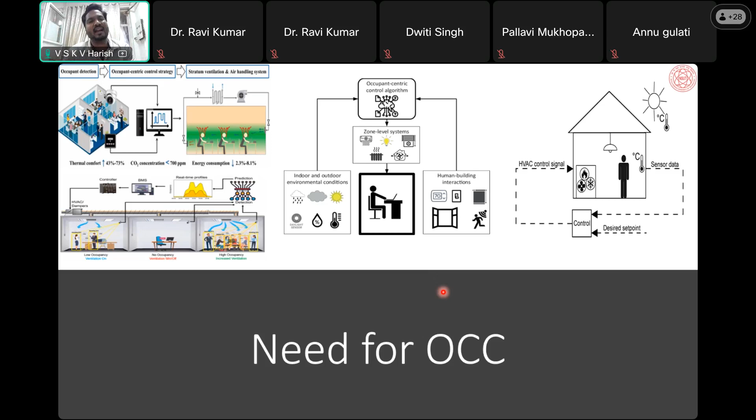Again, I have a sincere request to all the participants and all those who are watching this FDP that all the definitions that I will be giving in this presentation will come from a particular reliable data source, right? So I sincerely request all the researchers, budding researchers or research scholars to kindly go through standardized papers or standardized agencies only, and not only through Google or Wikipedia, right?

So coming back, the International Energy Agency is one such agency which publishes white papers and open access reports. Every year it publishes an energy efficiency report. As per the energy efficiency report, the total energy usage for the building and construction sector is increasing rapidly over time. There are many reasons for it. We understand that there is an increase in population, but at the same time, there is an increase in the standard of living also, right?

And if you come to major cities in India, Kolkata, Delhi, Mumbai, Chennai, Bangalore, you will see that each of these cities has a certain greater part. Delhi, Greater Noida, Noida, Kolkata, Greater Kolkata, Mumbai, Navi Mumbai, right? So these cities are also growing. At the same time, the construction sector is not only increasing surface-wise, but it is also increasing vertically.

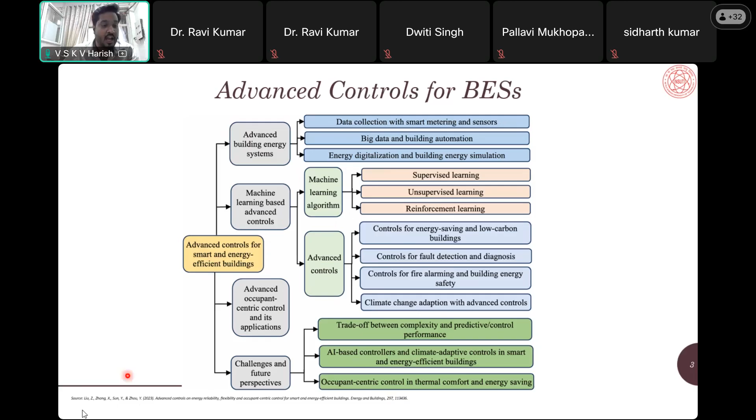For example, if you are working on peer-to-peer power sharing and trading, you are saying that, okay, there are two buildings. One building has a solar PV on the rooftop. The other building, maybe due to weather conditions or not having that much capital investment, does not have a solar PV or has a solar PV of lower installed capacity. Then excess energy can be sold to my peer, to my padosi, to my neighbor, right? Now that excess energy sold to the peer or to the agency can be handled in such a way that it is completely automatic and takes into consideration the occupant's comfort as well. So this becomes a very interesting research study as well.

So advanced building energy control systems can be studied and reviewed in terms of data collection, smart metering, machine learning challenges, and so on. If you look at the relationships and interdependencies between the indoor environmental parameters and their impact on perception and behavior, findings clearly confirm that the occupants' expectations with respect to the environmental conditions do influence the occupants' interactions with the buildings and their energy systems. And such interactions influence the energy performance of the built environment.

So it is not only that, okay, you have installed LED lamps, LED bulbs in your building, मेरी building energy efficient बन गई. ऐसा नहीं. That was a decade-back thing. If you go through the Press Information Bureau, last year the Bureau of Energy Efficiency came up with a gazette notification about the 5-star, 4-star ratings of ACs manufactured before 2024 and after 2024.

So they have given that before 2024 or 2022, this is a 5-star AC. Today, in 2025, you should consider it to be a 4-star AC. That is what I'm saying, because the energy target also becomes obsolete, right?

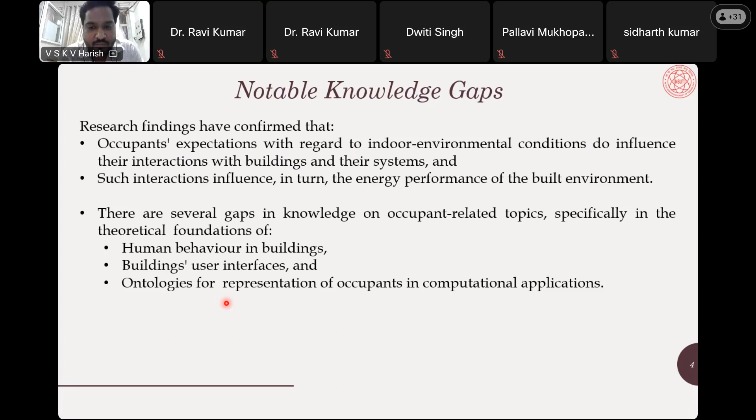So it also became obvious that a truly interdisciplinary or multidisciplinary approach involving representatives of physical sciences, engineering sciences, and human sciences is necessary to cover the complexity of this topic, which is occupant comfort centric control. Not only architecture, planning, mechanical, civil, electrical, electronics, communication, and CSIT people should work together, even the social aspects of it are very much necessary to understand occupant comfort centric control.

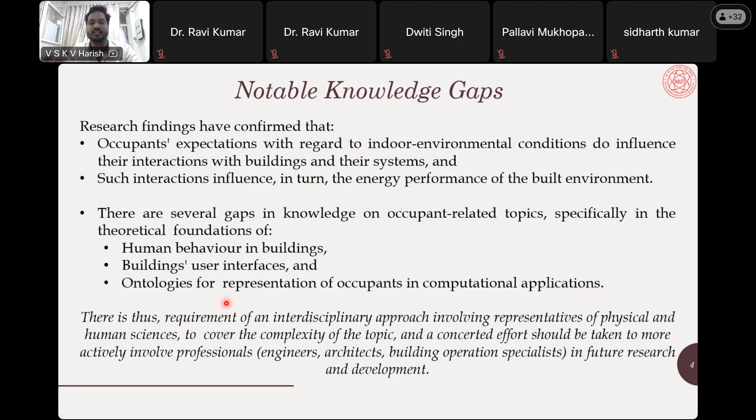I hope I have taken sufficient time for you to understand the relevance of why it is important to know occupant comfort centric control of building energy systems.

If we come to know how do we approach it and why is it necessary, the main question we need to formulate here is: we understood that yes, it is important that we consider occupants' comfort because there cannot be a smart energy efficient control if the occupant is not happy.

If I am sitting inside a building and my light, fan, AC, printer, laptop are automatically running, but I am not happy about it, if I am not happy with the energy systems operating in my cabin on their own, then I will not regard it to be a smart energy control system.

So how can we integrate occupants or humans into the energy control loop for smarter building operation? Or in other words, how can building energy systems balance the occupants' comfort with energy efficiency targets? This is the major question that we will try to address in this course of presentation.

How can we integrate humans into the energy control loop? And how can building energy systems be operated so that they balance occupants' comfort with energy efficiency aspects?

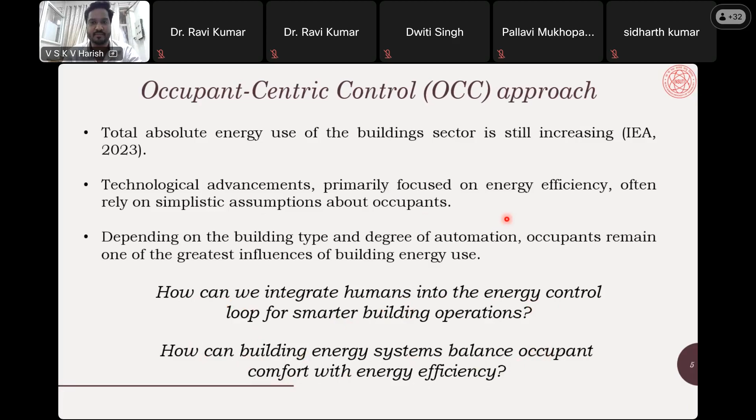Traditionally, occupants have access to an interface, remote control, or thermostat. That is traditional control, using plus and minus, with a device that has certain sensors, through infrared, Bluetooth, Wi-Fi, or whatever mechanism, because we can also use mobile phones to control my TV, my air conditioner, if I install a Blue Star app or an LG app, whatever it is.

That means we can use mobiles, my mobile, to switch on, switch off, and change the temperature of this air conditioner. My mobile is connected to the internet through Wi-Fi.

So I can develop an HTML cloud page and control, regulate, and collect all the data for many years on how I am using the AC on June 9th, 2025, 2026, 2027. How I am regulating it, what is my mood, what is my preference, how I am here. Maybe there is a CCTV camera, so I can get access to the activity through the CCTV camera also.

Just hold this thought, okay? It is very interesting. We can control the mobile, right? And interestingly, my electricity distribution company, which gives me the bill for usage, can also access my mobile.

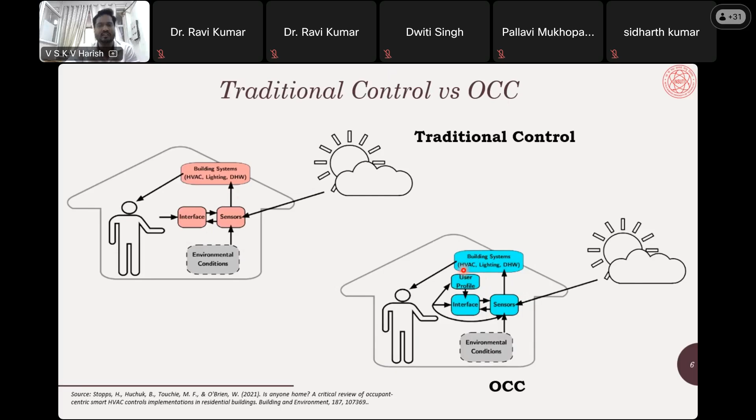That means the OCC systems, the occupant comfort centric control systems, rely heavily on occupants' behavior and their direct interactions with the systems. They develop user or consumer or occupant-definable programs to understand preferences and thereby adjust indoor environmental conditions through set point control of HVAC systems, lighting systems, or DHW systems. So it becomes necessary and interesting to model the occupants and their behavior.

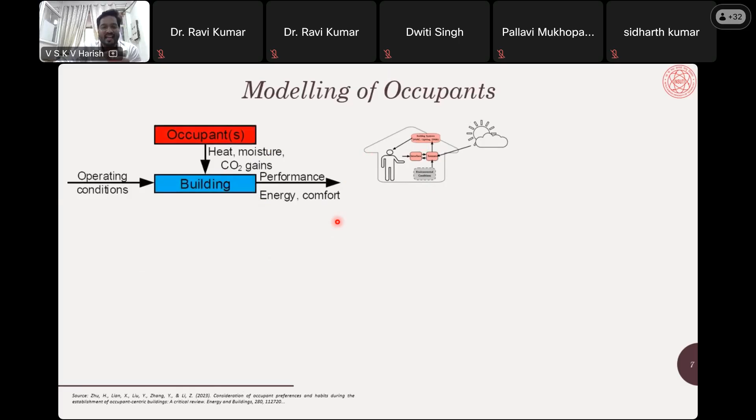International Energy Agency - I request all of you to go through IEA EBC Annex 66. I'll show you, let me share my screen. I think I did not share my screen yet. I'll share my complete screen here. Now, if you go through International Energy Agency's EBC, Energy in Buildings and Communities, Annex 66 - if you go through this, it is open source. Sir, can you see my Chrome? Google Chrome, is my entire screen visible? Anybody from the participants?

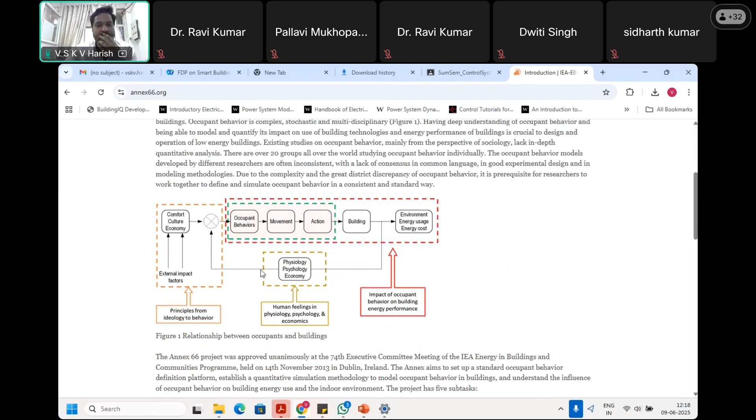It's visible, okay. Now go through this, it is very interesting. If you go through this annex, you can also participate, collaborate, and show your interest, and they work on different research papers. They have different working groups. This annex is completely dedicated to the definition and simulation of occupants' behavior in buildings. You can see what this project is all about, how they are meeting, what will be their next meeting, what is their goal, what are their sub-tasks, how many publications they have published, what is their collaboration, and whom to contact.

Interestingly, you can see that a large amount of research is being developed on the modeling of occupants. So that's what I told you, I will give you the area, the web page, from where you can get the data. I read two papers from this Annex publication, and it was very interesting because they identified through real-time experiments, not theory, that there is a strong influence of occupants on building energy performance. A universal framework will not be possible to develop - this is the first step, second step, third step, fourth step - but they can develop certain guidelines for experimentally studying and modeling the different behavioral patterns and actions of occupants, and how to implement those in building energy simulation platforms. You can use any platform.

You can use Energy Plus, TRNSYS, Design Builder, or you can go through complete modeling or programming in Python, MATLAB, where you are developing the thermal modeling from scratch. And of course, MATLAB has evolved and has certain inbuilt libraries for air conditioner systems and other systems as well.

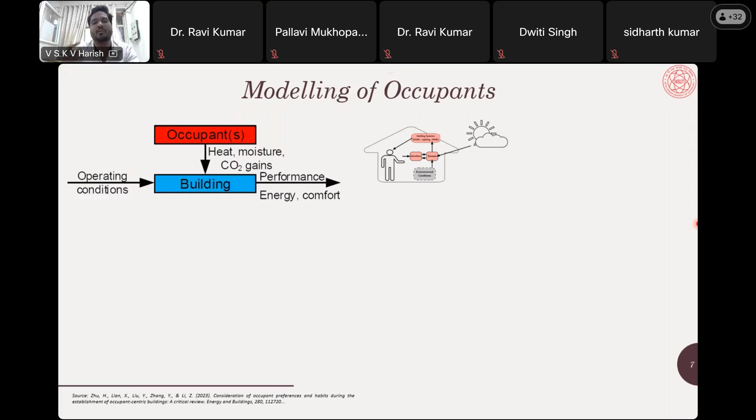So it is not only dependent upon the weather parameters, it will also depend upon the particular occupants and how they are using those building energy systems.

So there will be a paradigm shift for modeling of occupants. Traditionally, you only take, for example, if I am the occupant and I want to set my air conditioner, the only thing I give is plus or minus and give it the temperature reading. And it automatically takes into consideration that for this particular temperature reading of 26 or 25 degrees Celsius, depending upon how I am maintaining the AC, it will provide me the mass flow rate of the refrigerant.

But can it also consider that there is one small device, one small box, which is also controlling the visual comfort, the indoor air quality, maybe the acoustic comfort - that is the indoor environmental quality, IEQ actions - and then taking the particular decisions in terms of control?

At the same time, we are trying to achieve the energy efficient target also. What I really want to put forth here is that working on occupant comfort-centric control does not necessarily mean that we are not working towards energy efficiency or energy conservation. We are working towards energy efficiency and energy conservation without jeopardizing the comfort of the occupants.

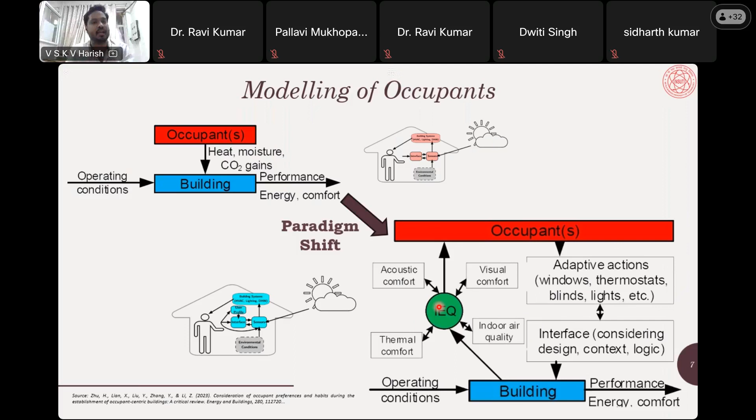That means it is necessary that we ensure occupants' comfort as well as energy savings. So these two things, occupant comfort assurance and energy savings, become the two essential objectives. So it becomes a multi-objective optimization programming problem, and it is interestingly contradictory in nature.

If you increase the occupant's comfort, your savings are less. If you increase energy savings, your comfort is less. So we are trying to work on the trade-off, and there can never be a single solution, because it is again dependent upon the occupant.

For example, you cannot give me a solution to travel from Delhi to Patna. There can never be a single solution. I can travel by train, by flight, take a bus, or use my own vehicle, depending upon my mood, my comfort, my finance, my luxury, and the time I want to take to reach Patna.

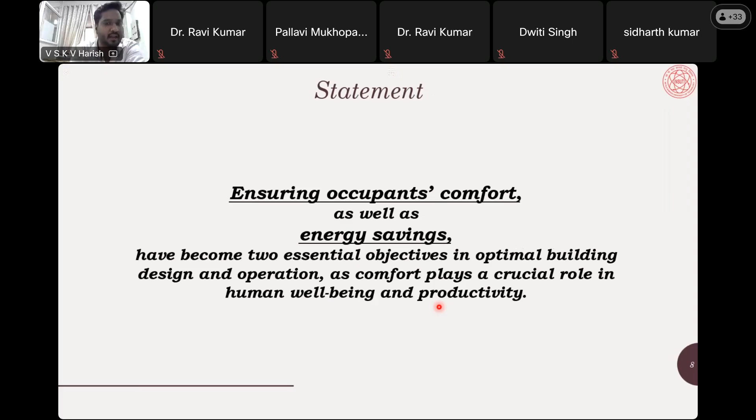So all these parameters will dictate and I will come up with a solution that I should take a flight. Is the flight early morning or afternoon? That depends upon my comfort and my finances. That is me being the consumer or the occupant in this particular aspect.

Now, if we talk about working on occupant comfort-centric control, we have to mathematically model the occupants and do the multi-objective optimization problem. But how do we integrate the comfort levels, especially the thermal comfort level, and develop a multi-domain architecture or multi-domain framework for the built environment where a consumer's perception of control and comfort is mathematically realized?

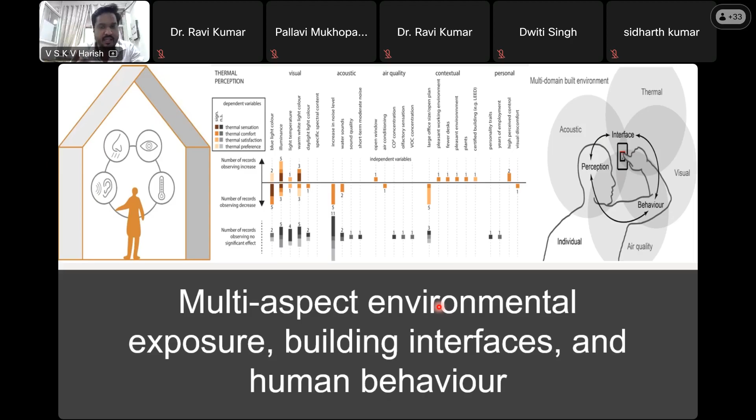So what I'm trying to say is, can a consumer's social behavior, the mood which I told you about, be mathematically quantified? There is certain research being developed and worked upon regarding what can be the primary elements of the multi-domain built environment that is being considered.

Now here we can see that, as I told you, how a particular user behaves at different periods of time - because collection of data is very much important. The data is very much important if you want to understand the behavior of the occupants.

Unfortunately, in India, I think very recently, in the last 10 years or so, we have tried to understand that building is a sector in terms of energy usage. Maybe in 2015-16, NITI Aayog came up with its National Energy Policy report, where I think it was the first time it was quantified. Otherwise, NGOs, think tanks like TERI,

CEEW, they were publishing reports considering that building should be a sector and it is accounting for this much of energy usage in India. And still, it is not very easy to get the data from an energy perspective. But if you go through excellent journals like Energy and Buildings, Building and Environment, IGBC, CIBSE journals, Chartered Institution of Building Services Engineers journals, and ASHRAE journal, a large amount of research papers are being published where they have collected the data and are publishing it for the last 10 years.

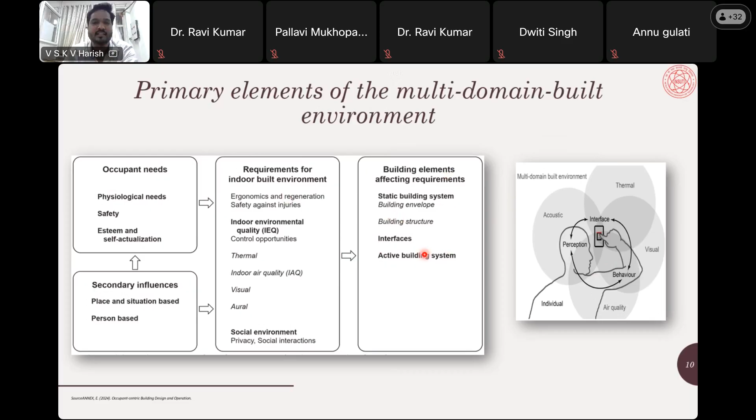And some of the data you will classify as data used for quantification of indoor air quality. Majorly, it is CO2 concentration in parts per million. Indoor air quality has become very important after the COVID scenario as well, because now standards are being developed where it's not only about how humid or how cool you are keeping the environment, but also, depending upon the occupancy, how much fresh air is coming in and how much stale air is going out through the exhaust. So the mass flow rate, that is the air changes per hour, ACH, is also becoming very important. Based on this, you can take building design decisions, interfaces, active building energy systems, which can majorly be worked upon in the building operation aspect as well.

How do you collect the data? One research paper that I came across was using solar PV systems, building integrated photovoltaic systems, and they integrated it with the Internet of Things, that is IoT.

Internet of Things, IoT, where there were a large number of solar PV systems which were integrated through inverters, and there was a weather forecasting system. So what they did is they were doing two things. Either you do the demand forecasting system where you get all the data and you know that this particular occupant or the occupancy family is using the demand like this, and this becomes a demand pattern. And through weather forecasting, you estimate that in the coming years, this will be your solar PV output.

So you do the weather forecasting or the input forecasting or the resource forecasting, and I will also do the demand forecasting. So you multiplex all this and keep the data storage, and that particular data can be analyzed, pruned, and used for machine learning based algorithm, and it is being saved in the cloud. So when it is saved in the cloud, every particular user will be given a username and password, for safety reasons, so that that particular data cannot be shared or used in the neighborhood facility or in the same building, but at the different floors of the buildings.

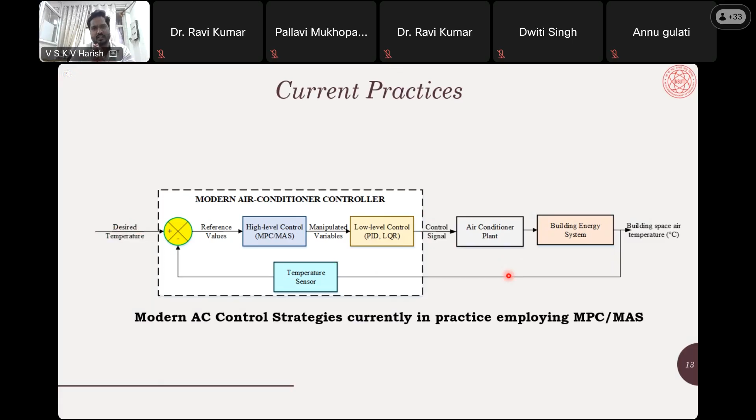Okay. Now, so these are the current practices which we are having. So why I have shown you this is because you can develop a MATLAB based model, EnergyPlus or DesignBuilder based model, and do all the energy calculations, loading calculations, and also energy usage and cost saving calculations, considering these aspects. Majorly, we can use transfer function modeling if we are working towards the control aspect.

Here in our department, in my room, what we are doing is we are developing a hardware in loop test bed of occupant comfort centric control, where we are considering this as the modern air conditioner control. Again, this is not a traditional control. So my benchmark is not traditional control. My benchmark in itself is a smart control, which is coming towards the market in the coming years, or costly, but today it is coming into the market.

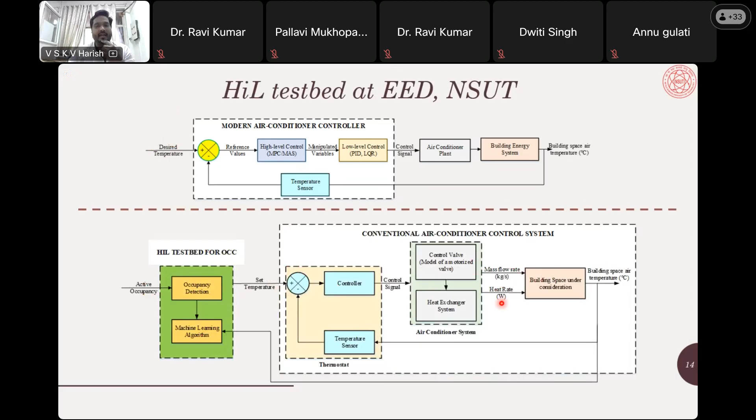And we are developing an occupancy detection. That is, I told you that we will consider the occupant's behavior, and that particular occupant behavior will be regulating this desired temperature. And that's what I have done here. Right? So it is regulating the mass flow rate and also the heat rate at which the building space will be considered. So this will be the space that we are working on.

These are the sensors that I will put. This is my cubicle. These are the sensors which I will put. I am already using this 5-star inverter based air conditioning system. And we will develop a machine learning based algorithm which will learn and observe from the data which is coming from this same ambient condition. This will be my condition from which it will come and save the data.

And we will develop. So there is Energy Plus simulation of the building energy systems, and the data will be collected there because Energy Plus gives very minute data and is very easy and open source. It's an open source software. Weather data of Delhi is available.

So all the occupants' comfort evaluation, all of this calculation will be done from the occupant behavior, and occupant behavior is being considered. There is a small, what do you call it, Google form that is being developed. And every day my researchers come and they ask me to fill that Google form. And that Google form takes into consideration hourly or minutely. And if there is some missed data where I have not filled the Google form, the same couple of slides before I showed you how you fill that particular data is taken into consideration.

So building energy, so this is a co-simulation which is going on. So building energy simulation is happening at Energy Plus, giving the data to MATLAB. The control strategies, the transfer function block diagram, will be developed in MATLAB. So we are working on the robust control where we are using Kharitonov theorem to understand the stability of Routh array and Routh Hurwitz, and the zeros are there in the right hand side, but bringing the poles on the left hand side and achieving the desired control action. And then we give the particular decision making to the lighting systems.

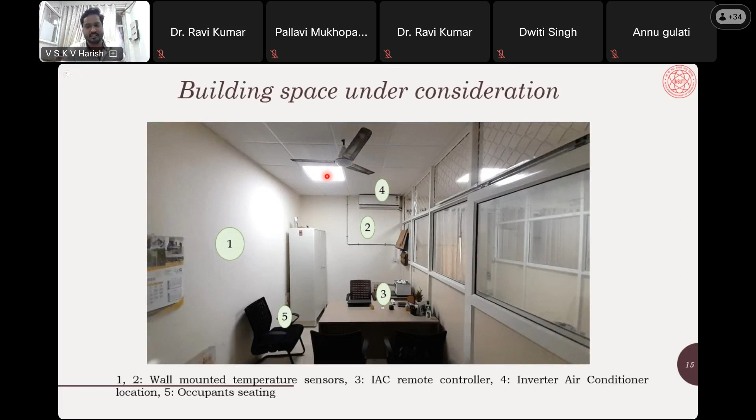Here, the lighting, unfortunately, we are writing a project where this is on and off. I cannot change the illumination level, but I want to change the illumination level. So there is 0 off, dim, slightly dim, average, then bright, very bright. So these are the 6 positions of visual sensation scale, not the thermal sensation scale, but visual sensation scale that we want to work on. Then this particular control strategy will become a little different and a little interesting.

So these are the parameters which we have considered for our building energy system model, because I told you that we will be developing the transfer function based model. For those who are not from EC and electrical background, transfer function is nothing but, since school we know that if you give time data, time will be in the x-axis and in the y-axis there will be a function. So f of t will be in the y, and it can be a quadratic or whatever curve. If I remove the time and do not do the time domain analysis, but the Laplace domain or a frequency domain analysis,

the x-axis will be something different and the y-axis will be something different. So I will not be getting a complete curve, but I will be getting certain points. Using those points, which can be poles and zeros, I can understand the behavior of the system. Whenever I change the location of those poles and zeros, I can change the behavior of the system according to my desire. So this becomes easier as compared to the time domain analysis, where I have to change each and every point of the curve, right? So that is Laplace domain, or the transfer function approach, loosely.

So here there are certain parameters that I have taken as controllable or uncontrollable. Uncontrollable means my control algorithm cannot change the behavioral pattern of that particular parameter. Okay. Controllable means that my control strategy will change it.

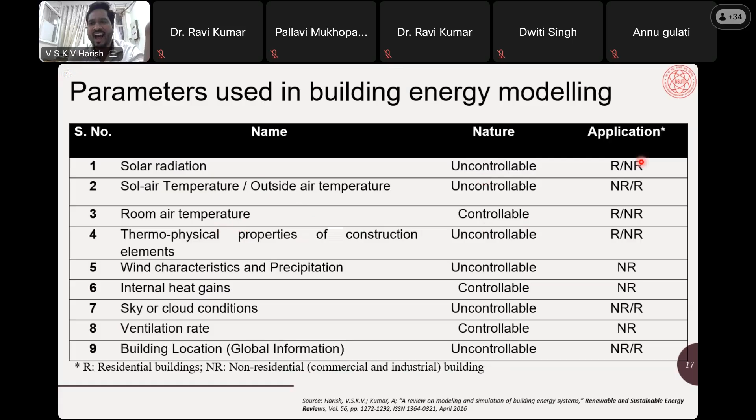RNR stands for residential or non-residential application. So again, we have developed the model using thermal electrical analogy. For validation perspective, I have developed the model in EnergyPlus and MATLAB and then validated it, so whatever control decisions MATLAB takes, they will be valid in nature.

So we have used thermal electrical analogy, which says that as heat flows from a higher temperature region to a low temperature region, electric current flows from a higher voltage point to a lower voltage point. So every thermal model can have an equivalent electrical circuit model where the parameters are dictated by this analogy of physics, where heat flow becomes current and the temperature becomes the voltage. Because the heat is flowing from high temperature to low temperature, the current is flowing from higher potential to lower potential.

So we developed a multi-layer building energy model where every wall is a multi-layered wall. So you have a brick, then you have cement, then you have insulation, then you have certain putty, then you may have a wallpaper. Each and every parameter I have taken from the ASHRAE handbook or the ASHRAE data, and we have used thermal electrical analogy to develop this model.

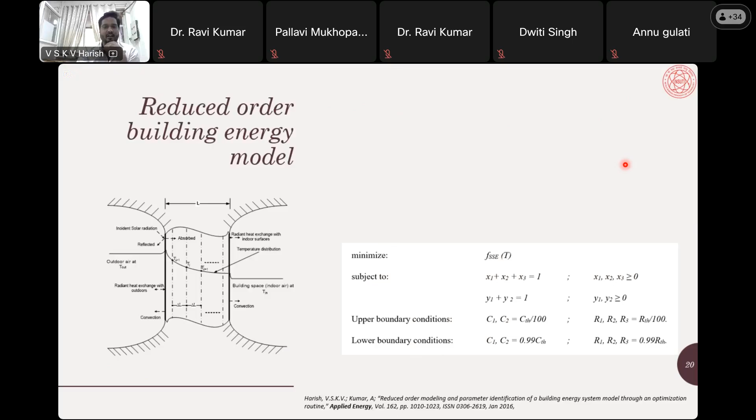I have used an optimization technique. I encourage all of you to go through this paper which we published in Applied Energy, where I have used the parameter estimation technique and also the model order reduction technique, where I have used a nonlinear constrained optimization technique to know what should be the value of R1, R2, R3, or C1, C2.

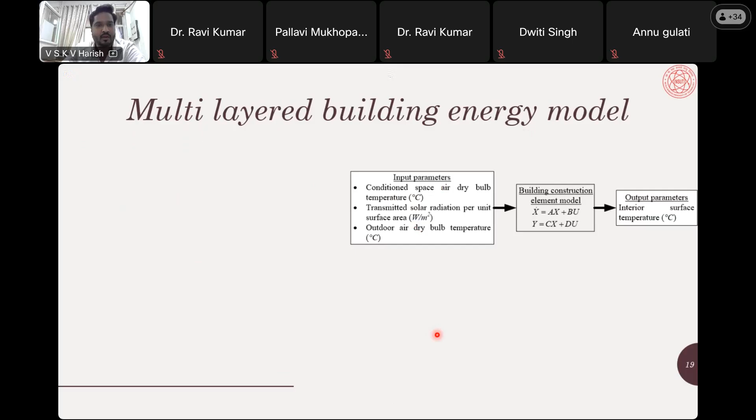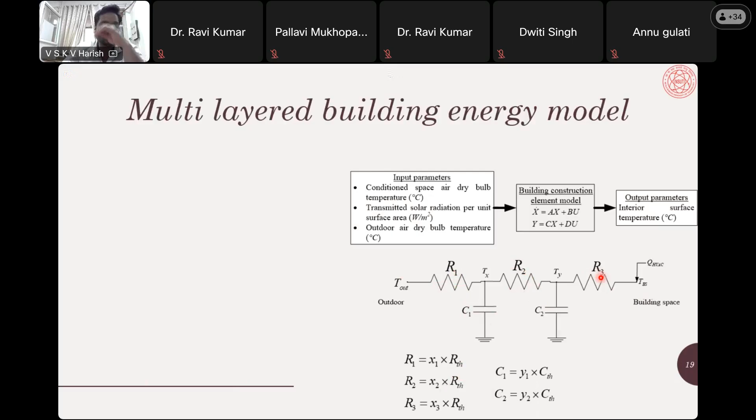Traditionally, I'll tell you what used to happen. Traditionally, you calculate RTH and CTH. This data is given from the manufacturer. So you calculate the total thermal resistance and total thermal capacitance. What studies used to do is, after calculating total thermal resistance, R1, R2, R3 were equally divided, 1/3, 1/3, 1/3 of RTH. For example, if RTH comes to 1000, this becomes 333.33, 333.33, 333.33. In a similar fashion, they equally divided the total thermal capacity. But that is not widely applicable for different types of buildings and different functionality of the buildings. So we developed an optimization technique.

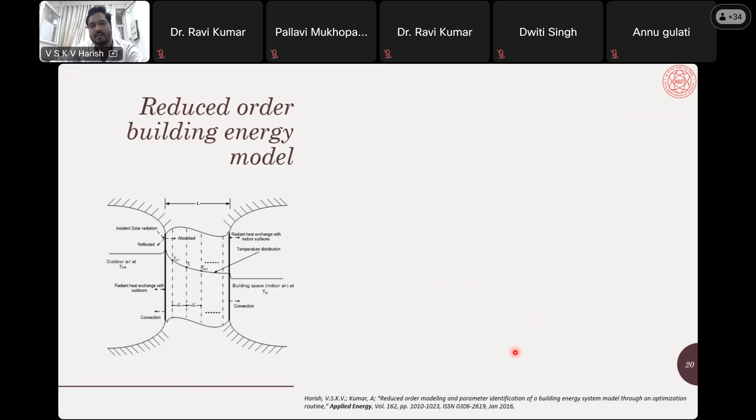We didn't have the funds to do an experimental validation. So what I did was I took the most accurate model for a wall. The most accurate model, of course, is an analytical model, but that does not make any sense. So I considered a numerical solution for that particular model. I used a central difference scheme where there were partial differential equations from Newton's law of cooling. We developed it for a multi-layered wall, and these layers were 100 in number.

And for the same system, I developed a 3 resistance, 2 capacitance network. I gave this particular model an input, and the same input was given here. This is my most accurate benchmark model, and the output from this model is the most accurate in nature, while the output from this other model is erroneous in nature. So I developed a mathematical function to compare these two outputs as sum squared error, SSE. It is an error index. So my optimization became that you have to minimize this error.

How do we minimize this error? Slowly, by changing R1, R2, R3, C1, C2. My algorithm automatically changed R1, R2, R3, C1 and C2 at each iteration so that the output of this model came as close as possible to the output of this one. The values at which these two outputs were very similar in nature are the optimal values of R1, R2, R3, C1, C2. This is for one wall.

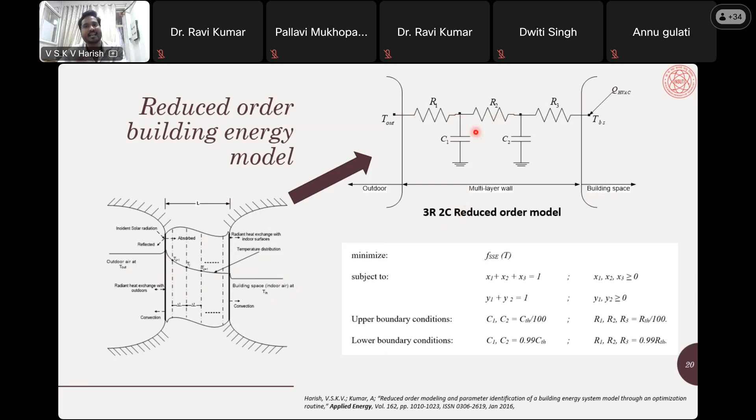I request participants, if you're sitting in your cabin or your room and you look around, you are geometrically sitting inside a cuboid. So you have 4 walls surrounding you, one roof, one floor, and windows. Every wall is a 3 resistance, 2 capacitance network. So if I have 6 such walls, 4 walls, one roof, one floor, I will have 6 such 3 resistance, 2 capacitance networks. And if I have windows, I will have a 2 resistance, 1 capacitance network because of the thermal capacity, since windows are transparent in nature.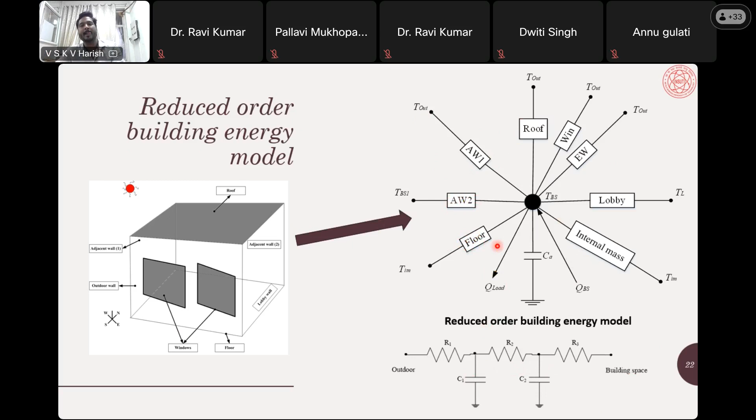So this is a 3 resistance, 2 capacitance network. So this floor block is nothing but this network. AW2, adjacent wall 2, the second adjacent wall, is a 3 resistance, 2 capacitance network, and so on, right? So now I have developed a building energy system model.

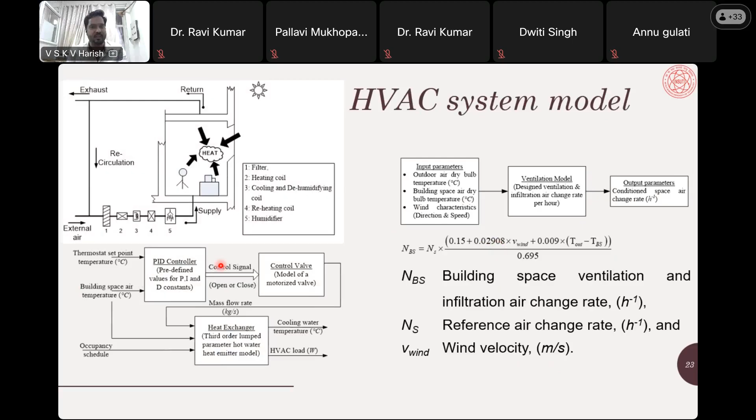Now I have taken an all seasonal HVAC system model where we have used already defined PID controllers, where the PID controllers are tuned using the Ziegler-Nichols method. In control systems, we use the Ziegler-Nichols method.

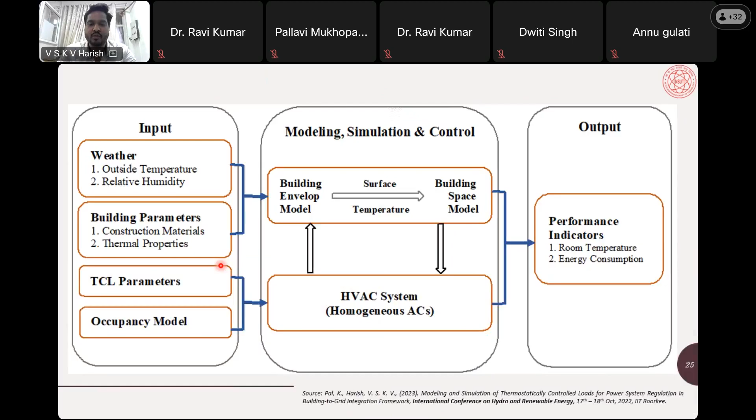During my PhD days, we took some data from the Indira Paryavaran Bhavan. It is the most energy efficient building in India. It is nothing but the headquarters of MOEFCC, Ministry of Environment, Forest and Climate Change. So we took some data and ran the analysis on that particular data. So this is the input which we have given.

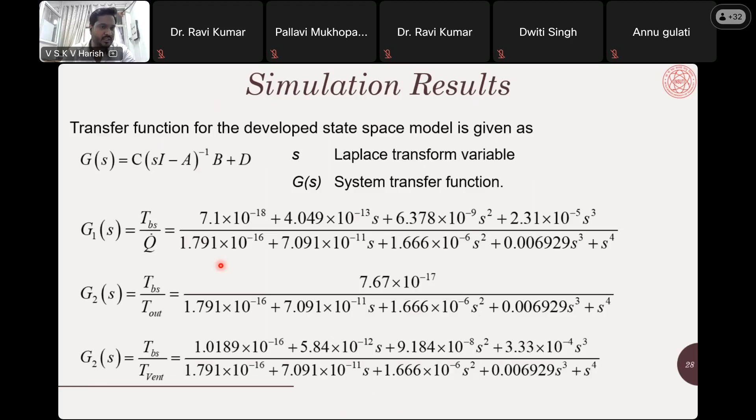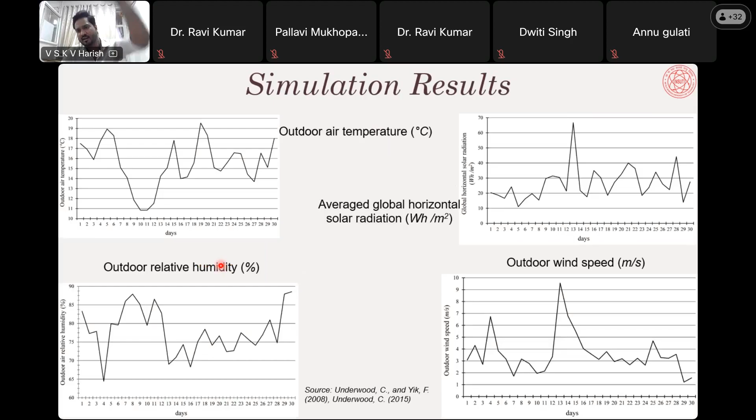As I told you, it will be a multi-objective or multi-input, multi-output system. So there will not be a single transfer function, but there will be multiple transfer functions. So these are the data which we have taken from the weather data file from EnergyPlus, and I have quantified them in Excel. These are the outputs which are coming from MATLAB, right? So co-simulation is happening. And now we have to mathematically formulate the optimization problem.

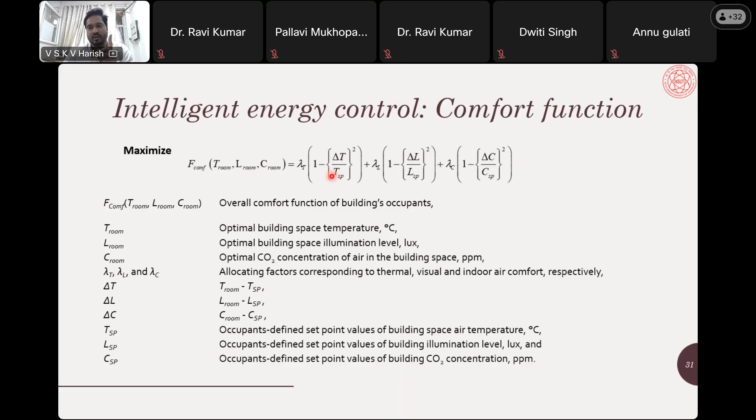So you want to improve the comfort. The comfort we have taken in terms of indoor air quality, that is the CO2 concentration of air in the building space, visual comfort, that is the building space illumination level in lux, and building space temperature in degrees Celsius. Here, we have used the mass fraction method of ASHRAE, where you integrate the relative humidity into the thermal comfort aspect.

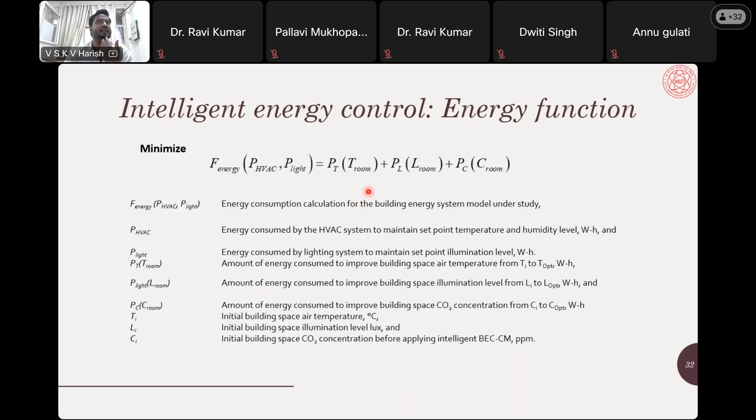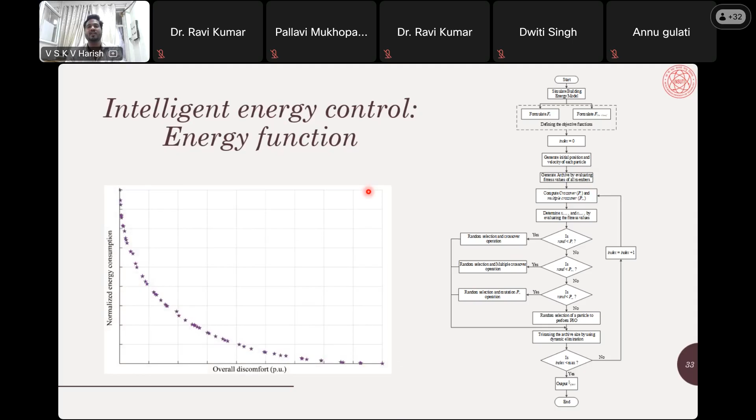In a similar fashion, I have to maximize the comfort here, and I have to minimize the HVAC and the lighting system energy. At that time there were no GA or PSO handlers in MATLAB, so we did coding to develop a hybridization of genetic algorithm and particle swarm optimization technique. So as I told you, there will not be one single solution. There will be a Pareto front or a set of sample solutions.

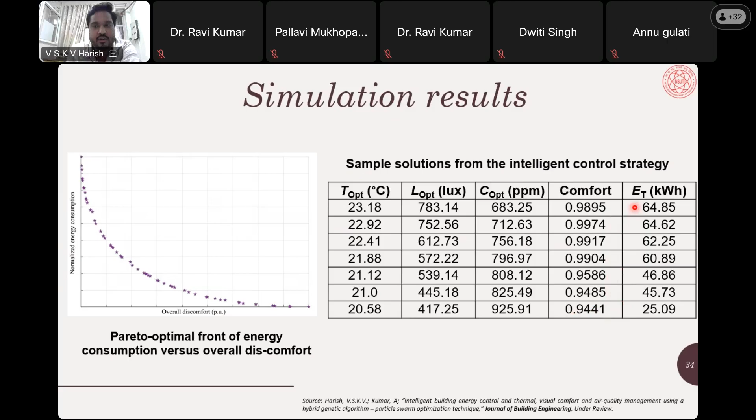So as you can see here, we did the comfort calculations using that mathematical formulation of comfort, and you got these results from the optimization technique. As you can see, this is in per units. So 0.9441 means 94.41% of comfort. As you are increasing the comfort level, you are increasing the energy usage, so energy savings is getting less. As I told you, it is a multi-objective optimization technique. And you are getting better control as well.

Here, there is one assumption that I have taken, or one limitation of my work, which we are working on since the last couple of years. The limitation here is, an hour back, I put the thermostat or the remote control at 22 because I just came from the meeting. Now I have kept it at 25. So the assumption which I have taken is, as you can see here, I am doing the analysis for 1 hour, for example. Here I am doing it for 24 hours. I'm just giving you the example.

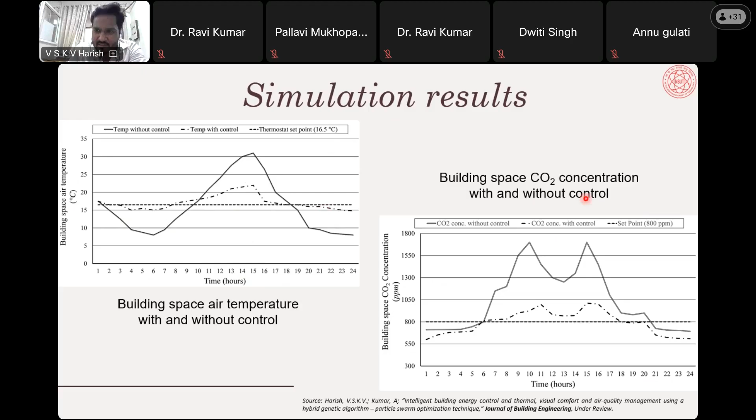Now, one MTech research fellow is working on where this dashed line is not constant in nature, but it also moves. So this thermostat set point, which on average came to 16.5 degrees Celsius in the month of June, is not 16.5, but again a curve. If it is a curve, the solution method which I have used, GA and PSO, has to be a dynamic optimization technique. So the optimization problem formulation will not be static in nature. It will be integral in nature. Similarly, this I have done for temperature, and similarly for CO2 concentration.

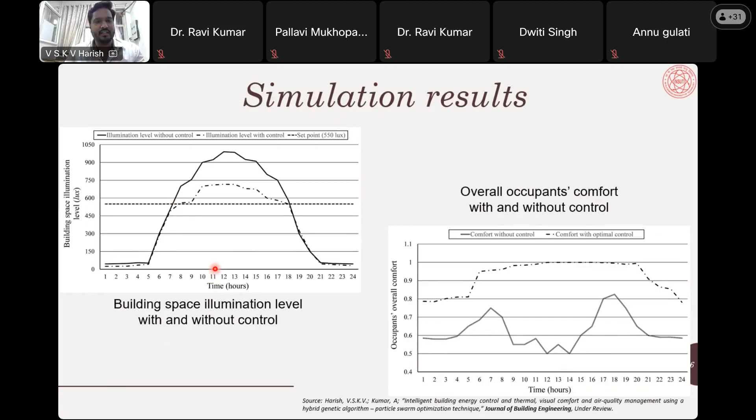Similarly for occupants' comfort, illumination level, and occupants' comfort - these are the energy savings I have considered for daily, weekly, monthly, and then again for annual energy savings.

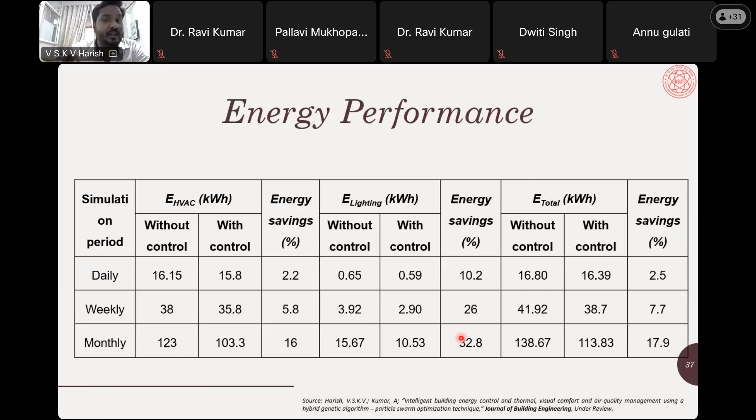Now you can argue that the savings is very less. Yes, the energy savings is very less. But I also want to get your attention that the occupants' comfort has also improved. So you are getting energy savings without jeopardizing the occupant's comfort. There is a win-win situation for every significant stakeholder, and the occupant is the significant stakeholder here.

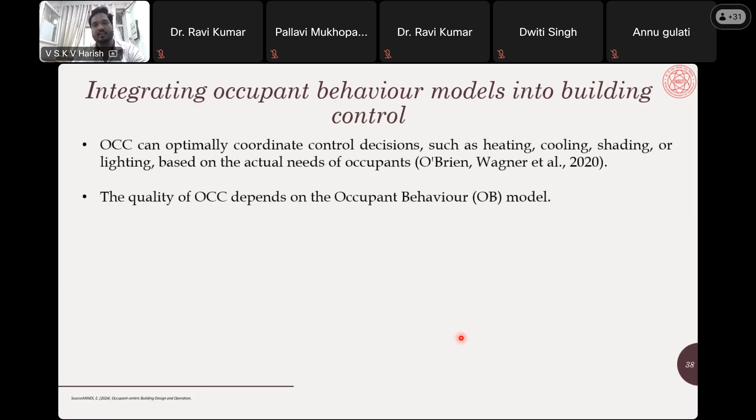So if we want to integrate occupant behavior models into building control, there are different types of models you can work on. One such model came from the International Energy Agency's annex. There is a book also, Occupant-centric Building Design and Operation, where they used the model predictive control technique. Model predictive control means for a certain finite time horizon, the control itself will predict how the model will behave without giving any input to the model. So at every time step, it develops a cost function minimizing the control effort and minimizing any modeling error which is happening.

So here the buildings are modeled as dynamic models or state space form. These are the dynamic models where the dot represents the differential equations. So they develop a state observer.

For people who are not from electrical or electronics background, let me take some time to make you understand the state of a system. Loosely, you have a system, and a system will have some mathematical parameters. Whenever someone says system, imagine a block with an input and an output - input parameters, output parameters, block system parameters.

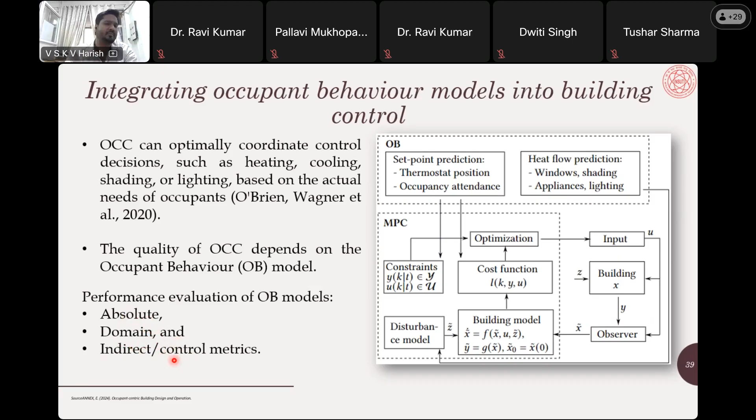Then there are indirect or control metrics, which are even more specifically designed to characterize the impact of occupant behavior on the building control objective - for example, the resulting impact on energy consumption and thermal comfort or overall usage. So the first two metrics, absolute and domain, give us a general overview of the model performance, and the control metrics show the actual benefits of predictive building operation.

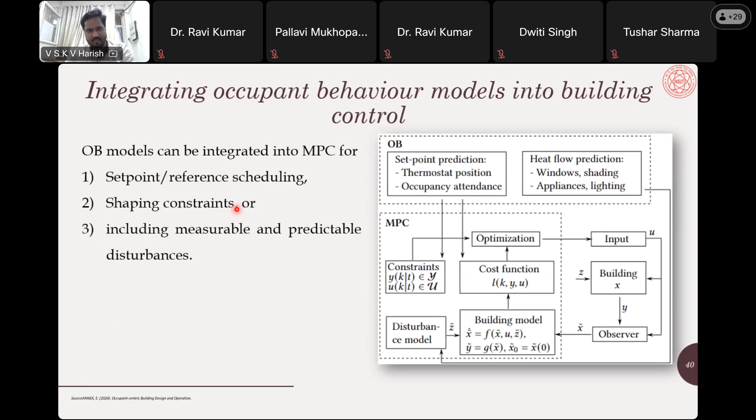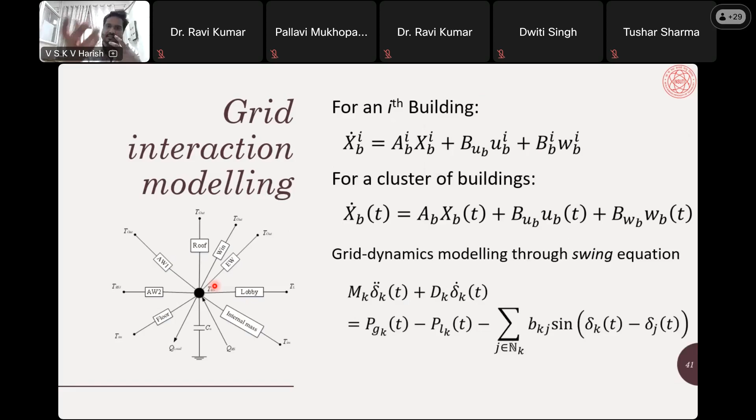So we integrate occupant behavior models into model predictive control, as already discussed, for set point reference scheduling - that is what we have done in my study, for shaping the constraints and including measurable and predictable disturbances. As I was giving you an idea of how we can integrate this in peer-to-peer or building-to-grid integration, this is how we do it. We develop a power system model, because every building is connected to the grid, so it is getting electricity supply from the grid. Now grid dynamics can also be integrated with this building energy system model.

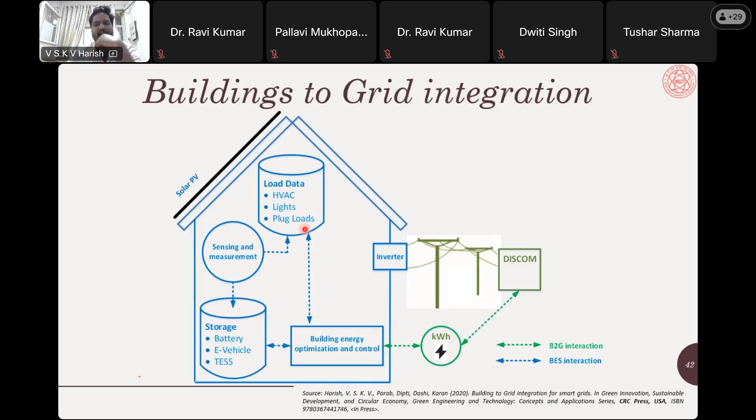There is no universal architecture or framework for buildings-to-grid integration. One framework for a net zero energy efficient building uses power electronic interfacing to connect it with the grid and take all the data from smart meters, including energy storage system data and load data, to develop a building-to-grid integration architecture.

In the coming years, my major scope is to develop a mathematical tool to evaluate the socio-techno-economic analysis of prosumer-based energy systems, and to assess the energy and environmental aspects of buildings without jeopardizing occupants' comfort. One of the most important stakeholders are the occupants.